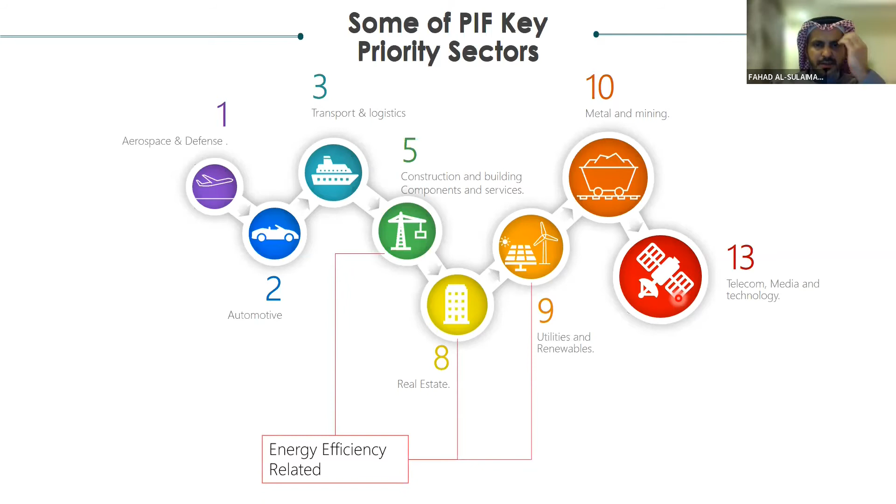When you look at the logistics program again, which is the NIDLP program, a major program in Saudi Vision, it has 4 programs, one of them directly related to energy. By the way, we have a big project now at KFUPM relevant to energy - we call it the Renewable Energy Technical Incubator - where if a student or faculty member at KFUPM, or even outside KFUPM, has an innovative idea, they can participate with it.

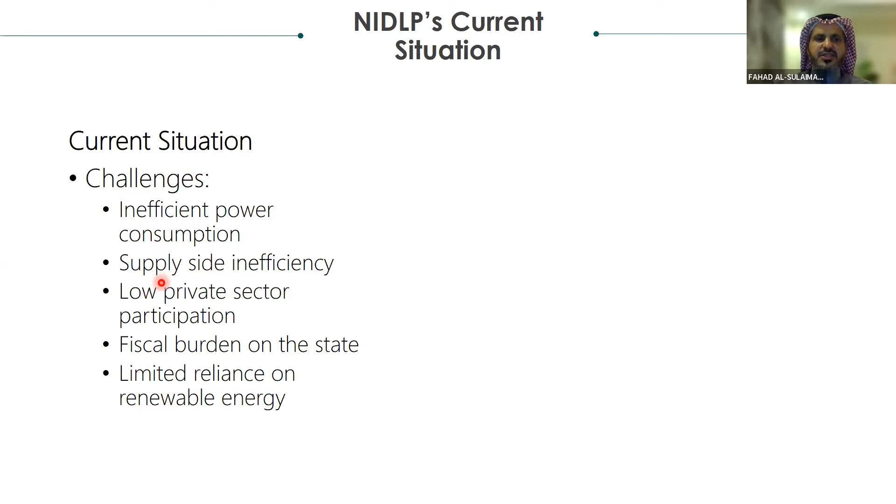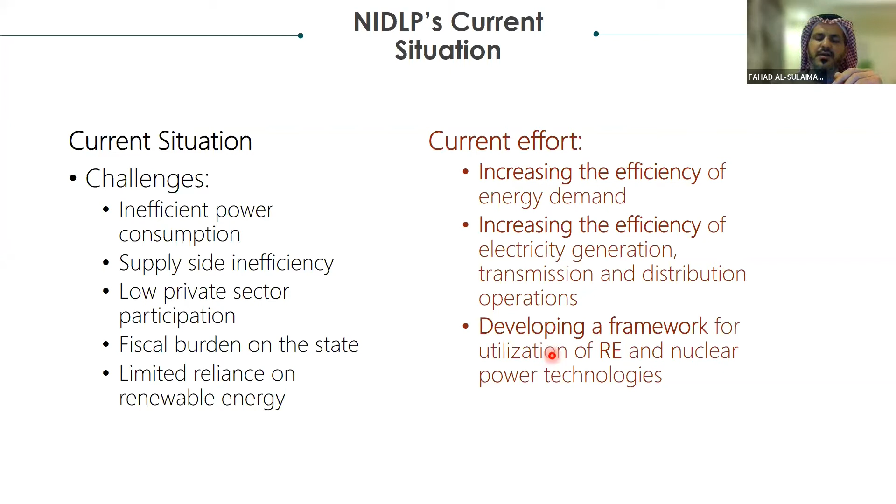In general, in this real situation, there are a lot of challenges - for example, inefficient power consumption, supply side inefficiency, and many others. On the other side, you need to resolve and overcome these challenges. For example, current efforts increase the efficiency of energy demand - where there is energy demand, you need a more efficient system, or likewise for energy production. For that reason, we need to develop the right framework for utilization of renewable energy and other power technologies. For example, the Quality of Life program, which was announced about 1 year ago, addresses how to have a better life among the different challenges you have.

For a better design, which is more efficient, the point is not just to have efficient energy consumption in a building. You have to think about the social aspect, the feeling, the productivity, even for the individual who is visiting or living in building X and Y. There are some criteria in architecture, all of which could be considered for the design.

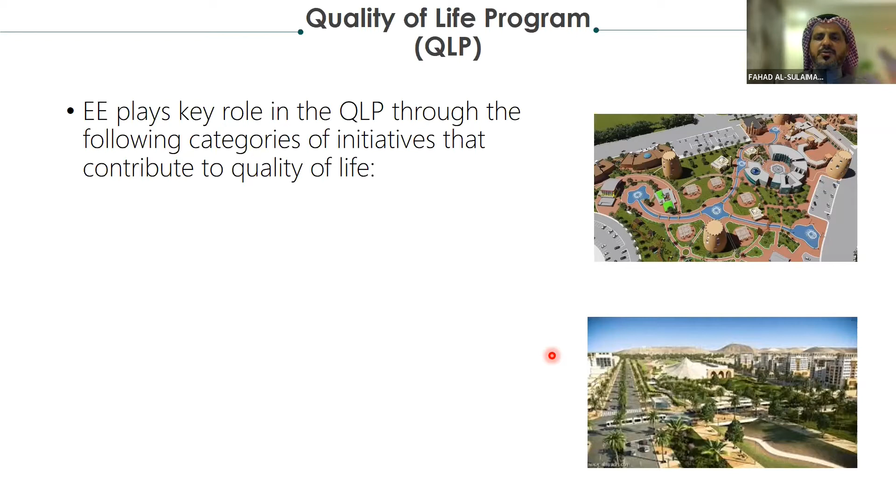As you're aware, His Royal Highness announced the Green Riyadh program, as you can see in the picture. Riyadh will move toward a very ambitious program to be more green. There is already a lot of programs like King Salman Garden and so on, but the point here is to improve the life quality.

One of the main initiatives in the Kingdom, which each one of us should be aware of, is the Tarshid program. Tarshid is a big government or semi-government company owned by PIF, and their objective is to improve energy efficiency for government buildings, and recently they are going toward the private sector as well. There is a business model where they can generate and save money, and from the saving difference they can generate money for new initiatives and programs. So this is one of the main initiatives.

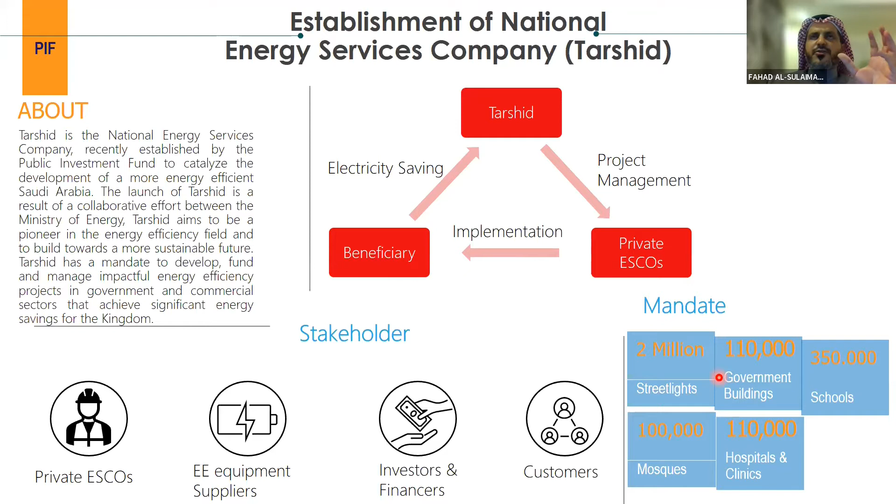For example, their mandate covers 2 million street lights, more than 100,000 government buildings, the schools in Saudi Arabia, the mosques, hospitals and clinics. So it's really a big initiative, huge in scale. They are doing this for the government sector for free, but they have their own business model to generate money out of that.

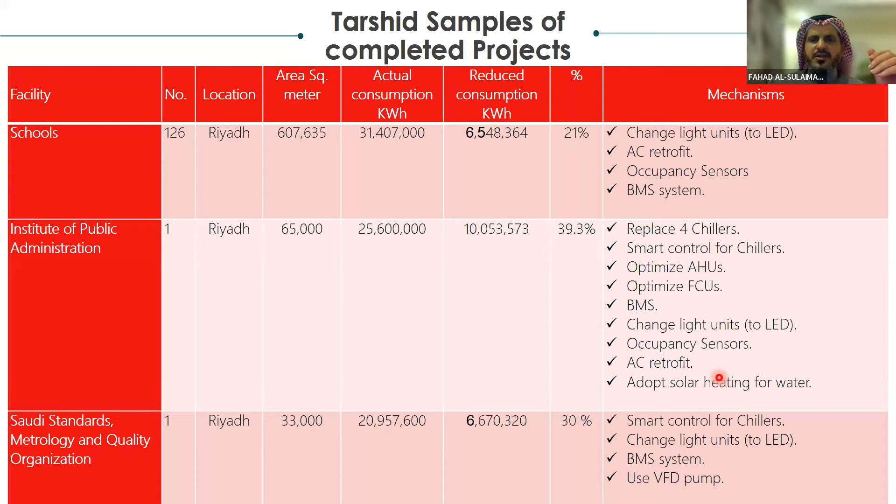These are some examples of their savings. I will not go through all the details, but I want to let you know about the importance of the topic. This is one of the initiatives by SEEC, the Saudi Energy Efficiency Center, in coordination with SASO and different entities in Saudi Arabia. This is just one example to encourage people toward using more efficient appliances.

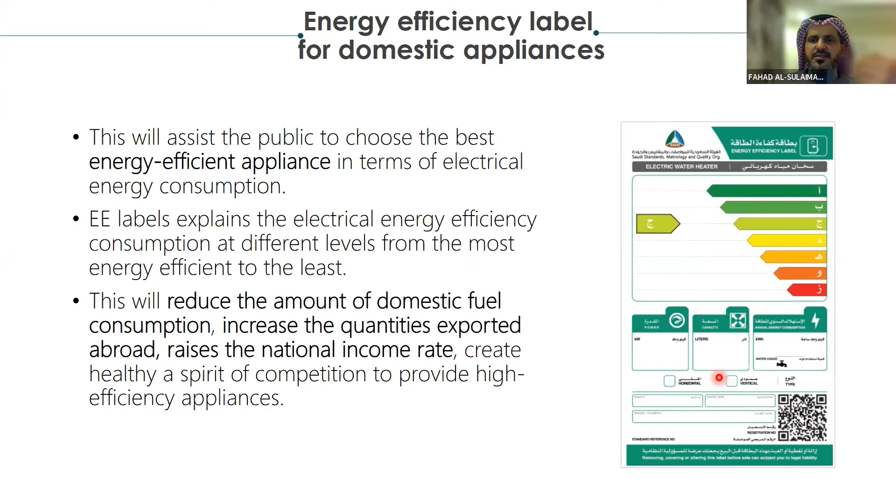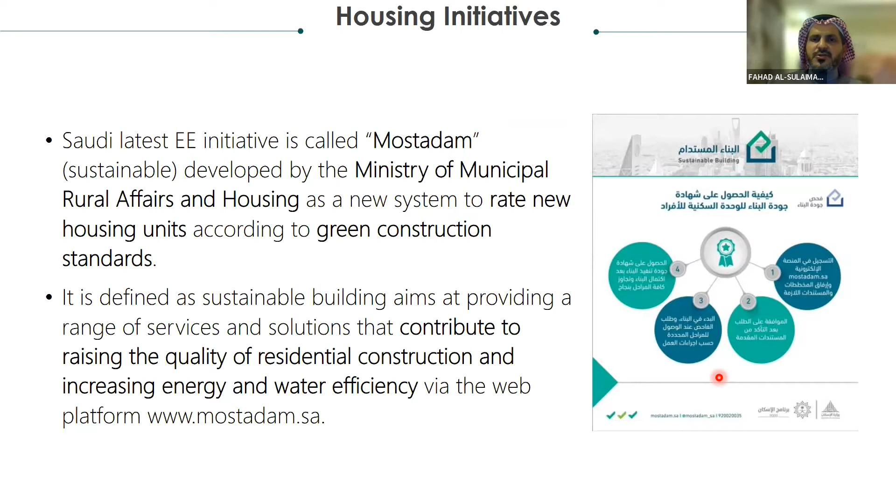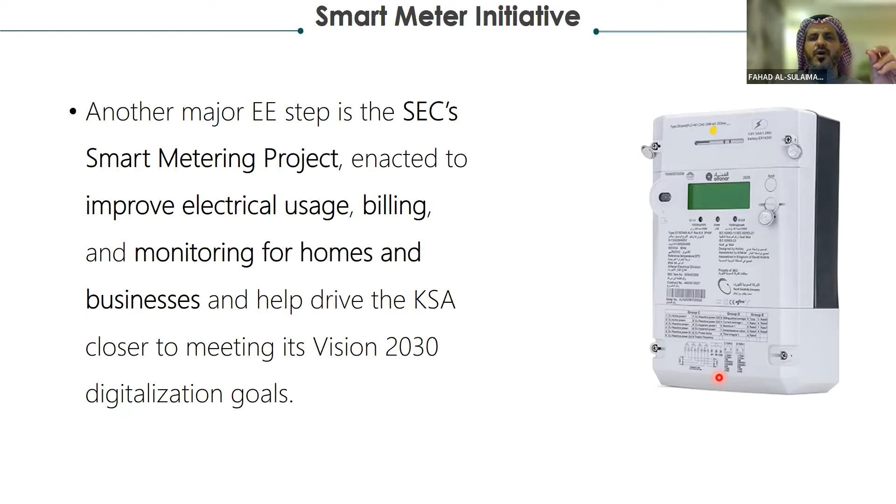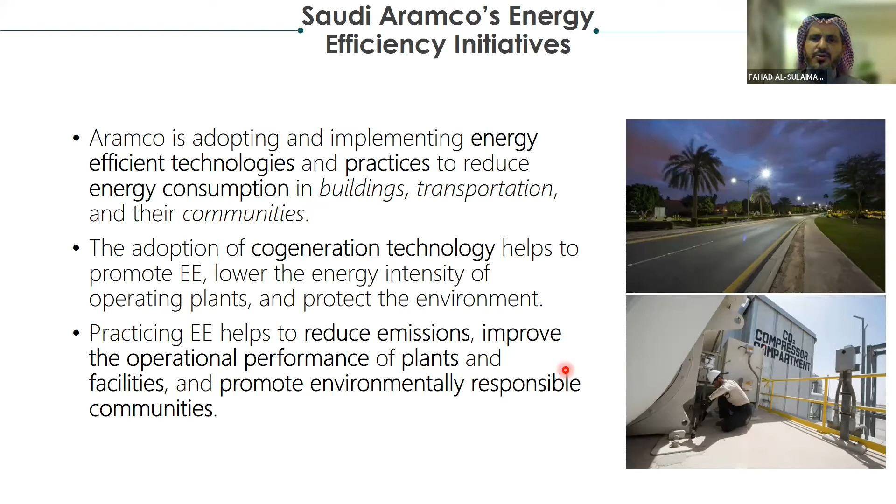One of the things also being implemented now: around 10 million houses in Saudi Arabia will have smart meters. This smart meter can collect all the detail about your consumption, and based on that it can recommend a mechanism to save energy. Aramco is also working on this - it's not just lighting, it could be for the power plant, for compressed air, and there are other benefits. It's not just about energy, because if you reduce energy consumption, you are also reducing emissions from, for example, the power plant or refinery.

As I mentioned, there is also the Saudi Building Code. They have one specific code for energy, another specific code for green building, and also another code for light. So it is becoming more important - the government is taking it more seriously.

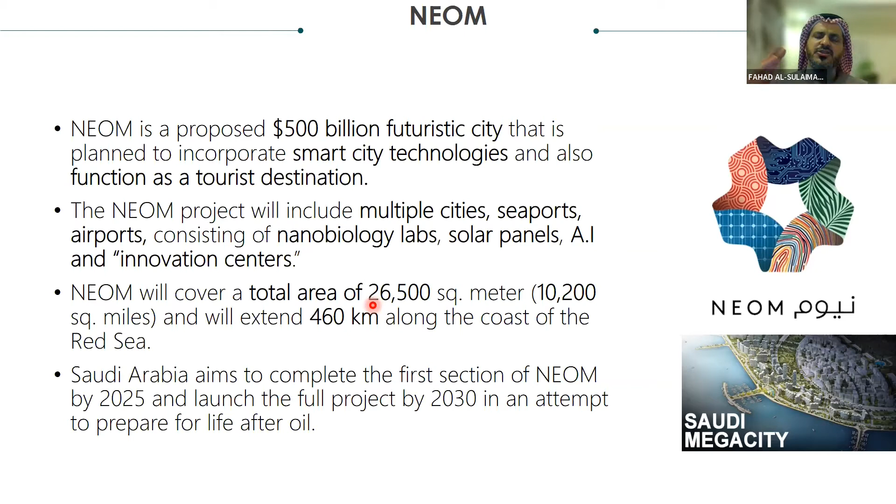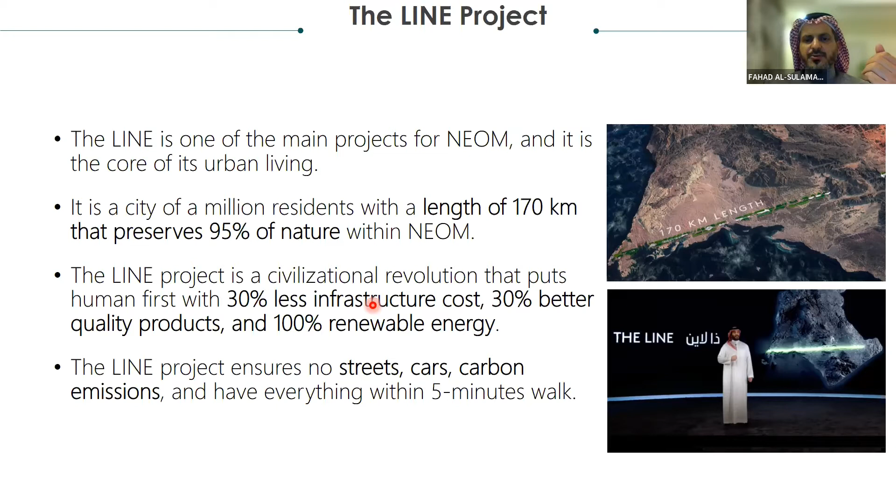Also, if you think about the giga projects in Saudi Arabia, we have a few giga projects. One of them is NEOM, planned to have an investment of $500 billion - a huge city, really big, with 26,000 square meters. This city will take state-of-the-art technology and will operate completely by clean energy, meaning renewable energy, hydrogen, blue hydrogen or green hydrogen, and so on. This is the Line, one of the cities you are aware of - it was announced by His Royal Highness Prince Mohammed bin Salman.

So here in KFUPM, you are aware of the business park, and in this business park, one of the major hotels there will be a green certified hotel. So this is just an example of the importance, or the action, being taken by KFUPM.

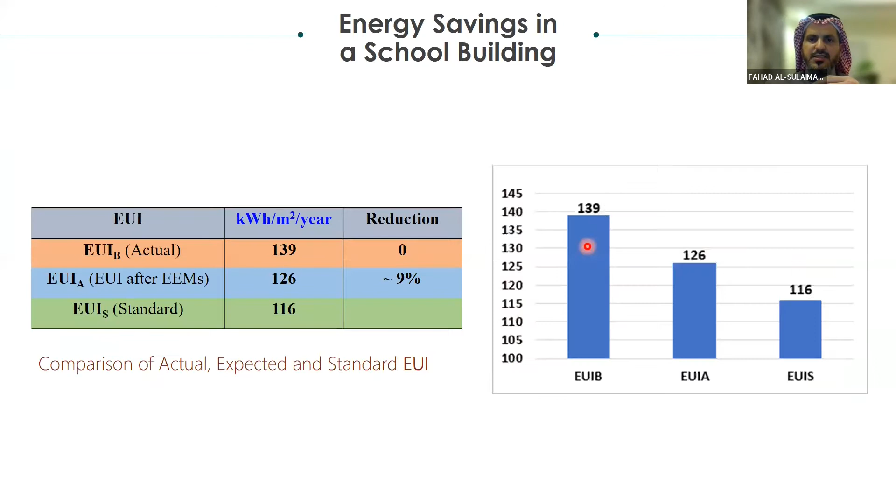So in the center, we have a good number of research related to renewable energy. I would like to let you know what we are doing, or energy efficiency, or in addition, utilization of Industrial Revolution 4.0 on the energy sector. I don't want to bother you with these details, but I would like to conclude with this introduction and give you the bigger picture about energy efficiency. It is really important because when you talk about energy efficiency, you can think about almost each sector, because each sector is consuming energy.

By the way, the word sustainability is becoming a hot topic, a more attractive and important topic, because it has huge impact. When people talk about sustainability, they mean energy, environment, and social aspect. This is just a short introduction about the importance of renewable energy and energy efficiency, and it's relevant to Saudi Vision 2030, and relevant to all the mega and giga initiatives by the government. Thank you a lot.

If there is a short question, we can answer it. I think one of the questions is asking about green building.

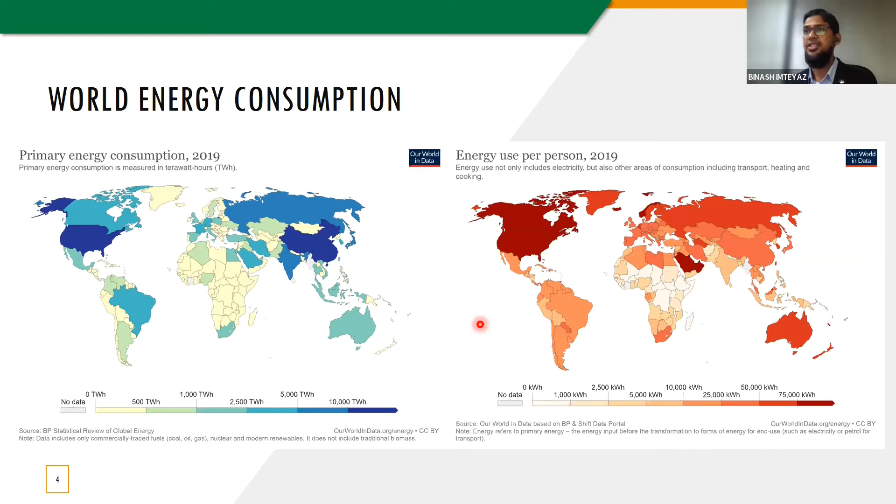So let's have a look at per capita energy consumption in Saudi Arabia. Compared to the world, the total energy consumption in 2019 was 89,000 kilowatt hour by Saudi Arabia, and 21,000 kilowatt hour is the mean for the world. Similarly, for electricity consumption, Saudi Arabia is much higher than the world average energy consumption per capita.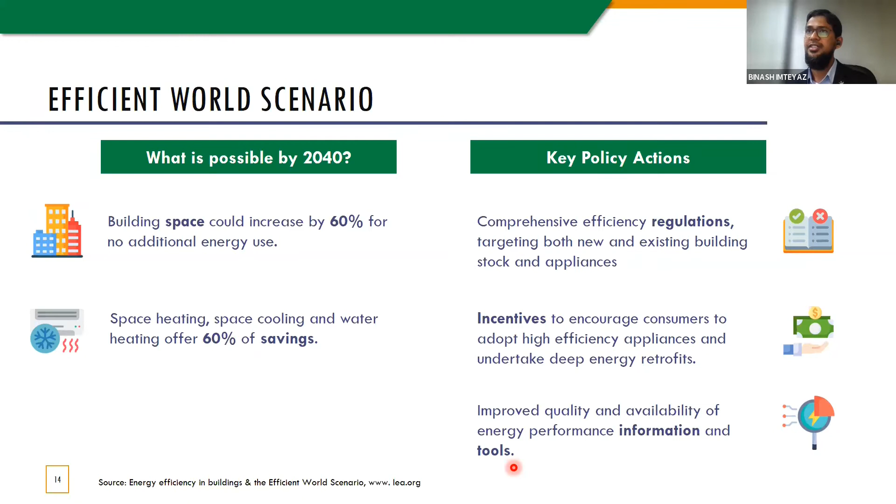Now we will focus on the building design. As in Saudi Arabia buildings are the most energy consuming sector, we will focus mostly on building design in this presentation. The more important factors are insulation, air tightness, ventilation, equipment, and finally renewable energy.

If these are implemented, this can reduce the total heat loss. It will increase the comfort inside the building, the quality of the air, and moisture management. It will optimize the regulation and control, and can be adapted depending upon the temperature and humidity of the system.

Some related actions that can be taken include the orientation and shape of the building, shadings and wind plantation around the buildings, then insulation of the floors, walls, and roofs. Ventilation of the building should be taken care of, like the air tightness among the roof, windows, and frame. Then higher energy efficiency air conditioners, boilers, heat pumps, and other equipment can be employed. And finally, renewable sources of energy should be made more available.

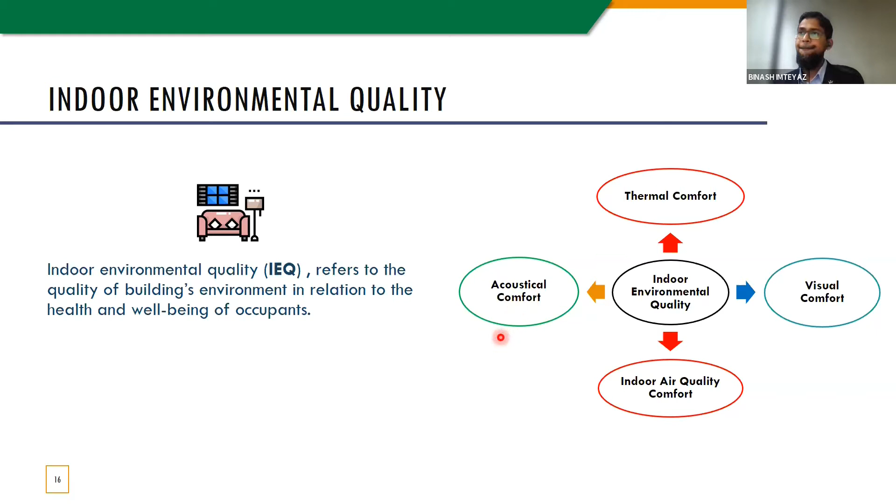Those are thermal comfort, visual comfort, indoor air quality comfort, and acoustic comfort. So we will go one by one through all of them, just to have a brief idea.

Visual comfort is basically a proper lighting system which causes little strain on our eyes and allows us to work comfortably for a longer period of time. Factors include the components we are working on, the light intensity in the environment, and the color temperature of the light.

For example, it depends. Sometimes you basically feel very bored. If you have too much yellow light in your work environment, you will not feel comfortable working in that color. But if you have yellow light in a restaurant, you will feel more relaxed and at ease. So color temperature is also a very important factor.

Light intensity, as we all know, sometimes a room is less lit than required, and this will cause strain in your eyes and headaches. Sometimes over-light is there, meaning the intensity is higher than the recommended value, and this also causes some problems.

Similarly, we can have a problem of glare inside a building, like if there is a reflection from a shiny surface, or if there is a window with bright sunlight falling on our eyes. So all these factors should be considered while we are designing the indoor environment in terms of light.

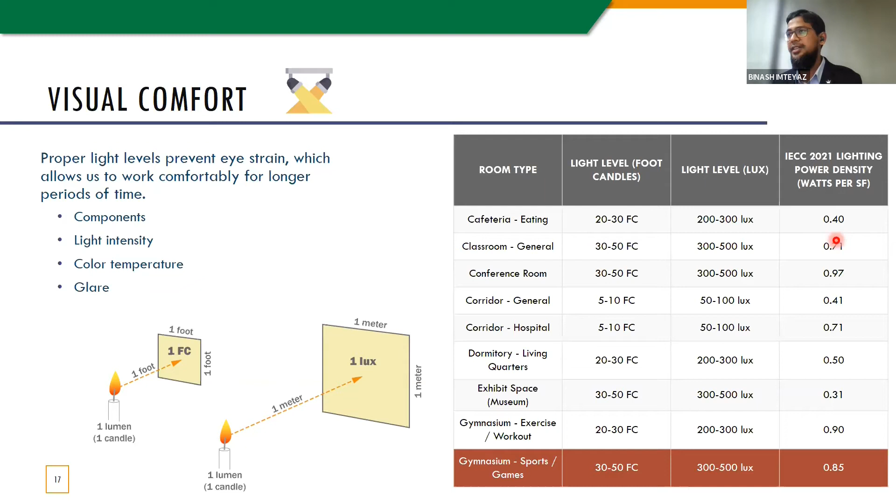Now, acoustic comfort is basically the well-being and feeling of a building or its occupants regarding the acoustic environment. If there is a lot of noise from outside, or continuous or high-pitched sound coming from the AC duct, Wi-Fi routers, servers, or anything similar, this is going to impact our acoustic comfort.

For this also, a standard has been set, and we need to ensure it doesn't exceed certain limits. For example, for complex tasks, the equivalent continuous sound level in general tasking should not exceed 55 decibels. However, for offices with very professional level work going on, it should not exceed 40 to 45 decibels.

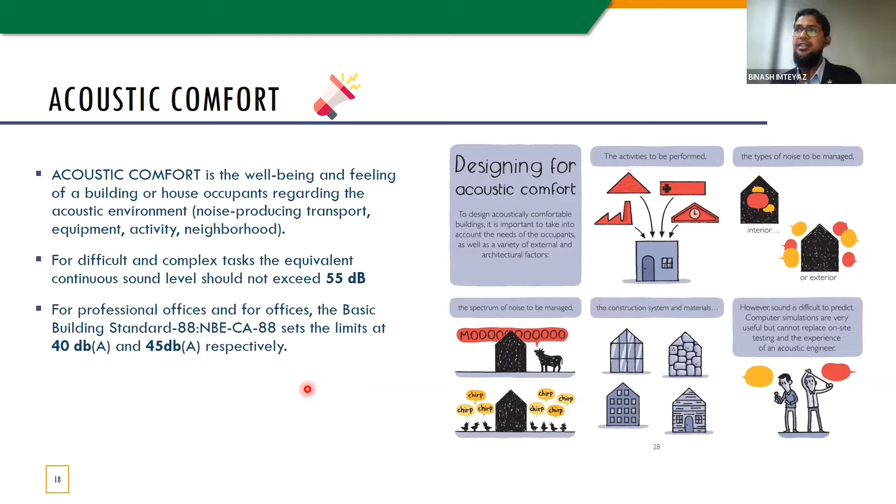There are design factors for acoustic comfort, depending upon the surroundings and the type of materials being used, and what type of offices or other buildings are around, which we need to take care of while designing a building.

Now, indoor air quality comfort. This basically refers to the amount of pollutants present inside the indoor environment, and indoor air pollution can cause different problems like nausea, headaches, sick building syndrome, and lots of other hazardous diseases.

Depending on the environment condition, whether it's inside an industry or a commercial building, we have different kinds of pollutants, and these need to be monitored, with a proper ventilation system in place to minimize the effect of pollutants.

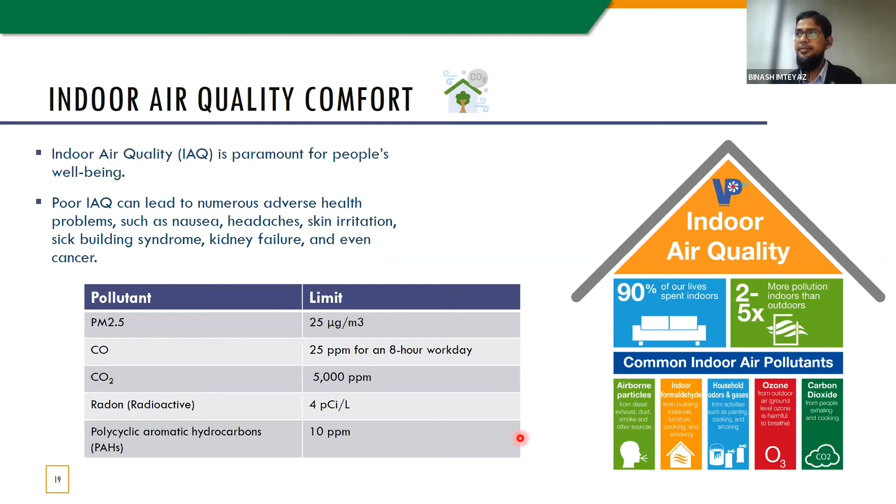Now let's come to thermal comfort. Thermal comfort is described as the state of mind when you feel comfortable with the environment.

Thermal comfort can be affected if you have very dry air, you can feel draught, which is thermally uncomfortable. If you have radiation asymmetry, one side is very hot, like if you are sitting near a boiler in an industrial facility, this will cause radiation asymmetry. Or if you have solar radiation falling on one side of a wall, you will feel radiation asymmetry, which also causes discomfort.

Then there is vertical air temperature gradient. If you have more than 3 degrees temperature gradient from foot to head, it will cause discomfort for human beings. This is also why, while designing an indoor environment, we take care about the uniformity of temperature inside the building. Moreover, floor temperature is also not negligible—it is another factor.

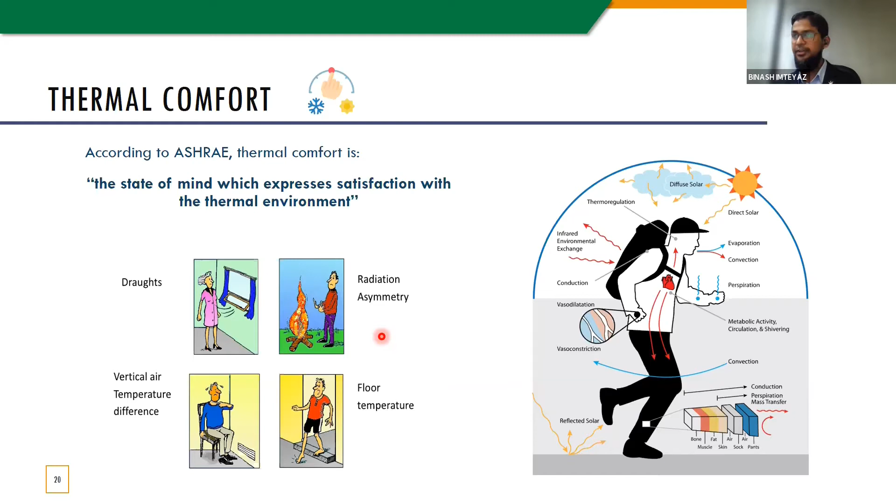So what are the factors for thermal comfort? Basically, there are 4 environmental factors and 2 personal factors. The 2 personal factors are clothing and metabolic rate—what type of clothing you are wearing inside a building or house, and what kind of activity you are doing inside the building. This constitutes the metabolic rate, and these are the personal factors that affect thermal comfort.

Then there are environmental factors like humidity, air speed, air temperature, and radiant temperature. We basically need to take care of all these factors while we design a building, and I will discuss this with some examples in the next slide.

So when do we say we are thermally comfortable? Thermal comfort is basically relative—some people might feel comfortable at a particular temperature, but another person may say he's not comfortable with that temperature and kind of environment. So to design a thermally comfortable environment, it has been suggested by the ASHRAE standard that if more than 80% of the occupants express their satisfaction, then the environment will be called thermally comfortable.

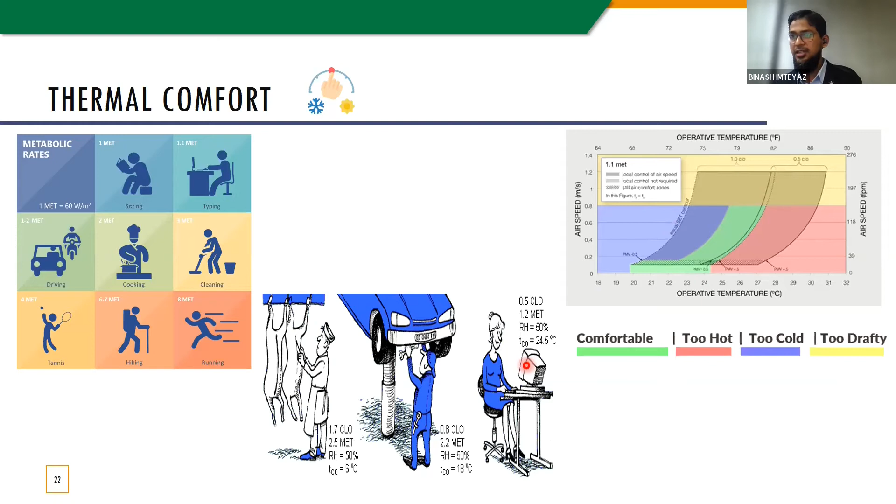Various factors need to be taken into account while designing the indoor environment, ranging from the insulation, orientation, the material we are using, and the kind of ventilation and air recirculation inside the system. So basically all these factors, like air temperature, orientation, thermal inertia, and the type of material we are using, can only be implemented at the time of designing a new building.

However, when we try to make the old building more comfortable, we need to meddle with the HVAC system, which basically controls the temperature, the air velocity, as well as the humidity inside the environment.

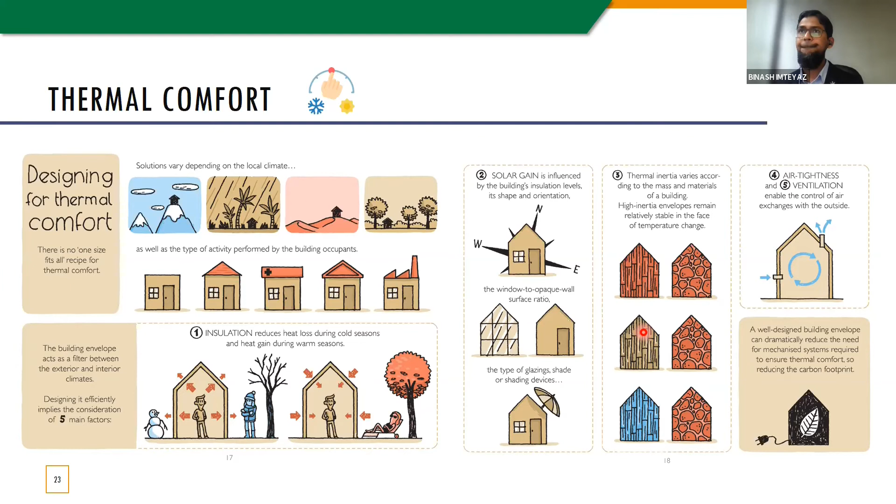So we will not go deep into the HVAC system, but just a brief introduction. There are two main kinds of air conditioning systems: one is non-ducted and then the ducted type. In non-ducted type, we have a split type or window type AC system, which is most common in residential buildings. Ducted types are like package type or centralized type, which is more common in commercial buildings.

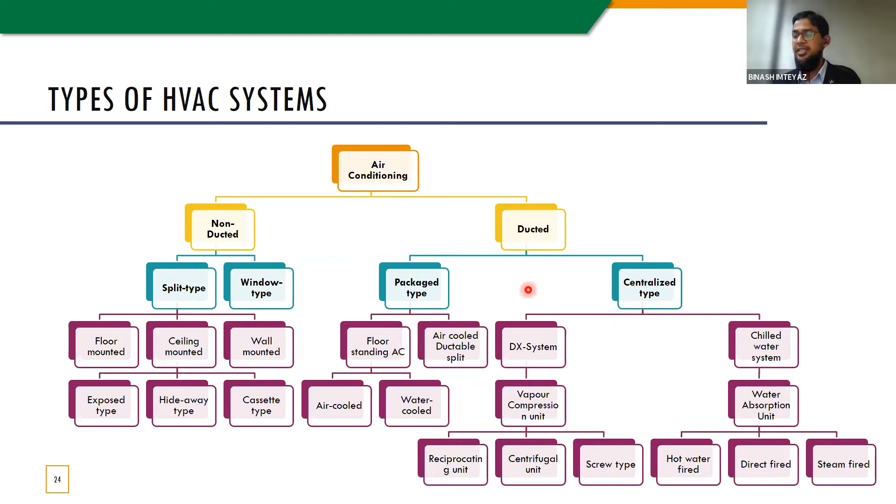So this is a design of the HVAC system. This is a window AC system, and there is no provision for fresh air inside either a window AC or a split AC. In both of these systems, the same air is being recirculated using this fan, and it is being cooled. So basically in a non-ducted system, we don't have any ventilation for the HVAC system.

However, in the ducted system, we have provision for fresh air recirculation. So we can add some fresh air, and we can also recirculate depending upon how much recirculation is required. The amount of recirculation again depends upon the type of building and how many people are inside the building, and what is the concentration of carbon dioxide and other pollutants inside the building. This will determine how much fresh air should be recirculated. We do not want to recirculate all fresh air because it is going to cost us a lot of energy, so an optimization between the fresh air is the best option.

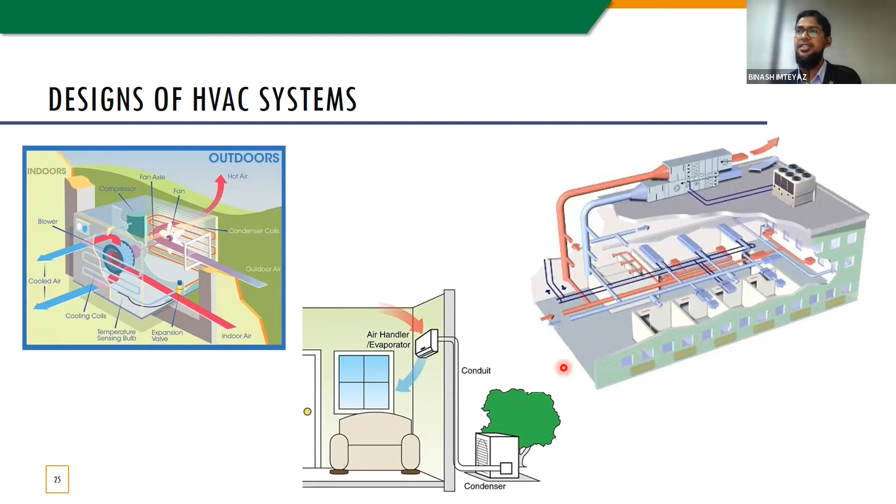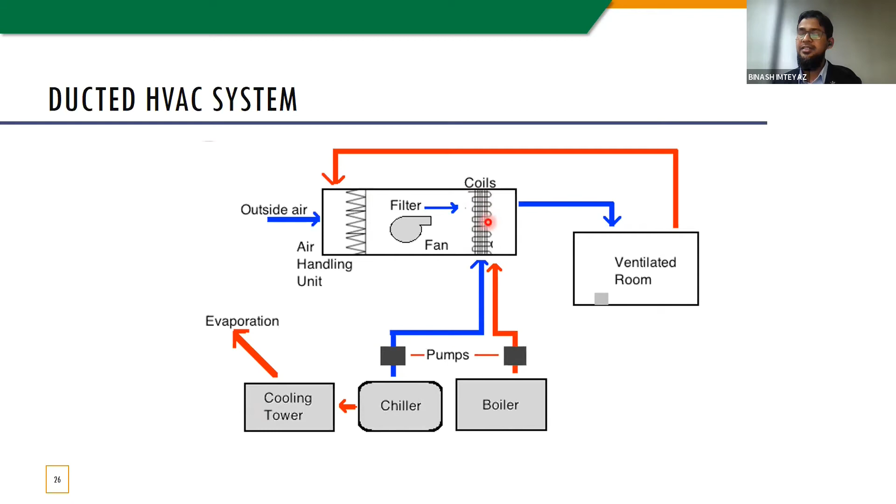This is basically a typical schematic diagram of a HVAC system. So this is a ventilated room where cool air is coming in, it gets heated, and we have a suction which is recirculating this air, and some part of outside air is being mixed, filtered, and then thrown to the coil, and again recirculated into the ventilation system. Now, depending upon either it is for the heating or cooling, we have a boiler or a chiller or a cooling tower, which is providing the energy transfer through these coils.

Now, without going deeper into the HVAC systems, we just want to get an overview about the energy performance. Energy performance of an air conditioning system can be evaluated using coefficient of performance, which is basically the ratio of heat absorbed divided by the total power consumed by the HVAC system. Higher the value of COP means the better the efficiency of the system. We know that the split AC and the window ACs have very low COP.

So these are less efficient than if you have a chiller, which can range up to 6.5 in the value of COP. These are the energy ratings which you can find when you are going to buy any AC or any electrical equipment, appliances or equipment.

Now, why is it very important to save energy at the end user? Because the amount of energy you are saving at the end user is affecting the producer. For example, in this system, I will show you how it is going to affect.

Basically, whenever there is thermal energy involved, the total efficiency is very low. For example, in this case, chemical energy is converted by the internal combustion engine to produce thermal energy, which is only 30% efficient. Then this diesel energy is converted into mechanical energy, and this generator converts mechanical energy into electrical energy, which drives the motor to get mechanical energy, and finally we get the pump for pumping the fluid. So the total efficiency of the system from here to the end will be the multiplication of all the efficiencies from diesel to generator to motor and pump, and this will be only 12%.

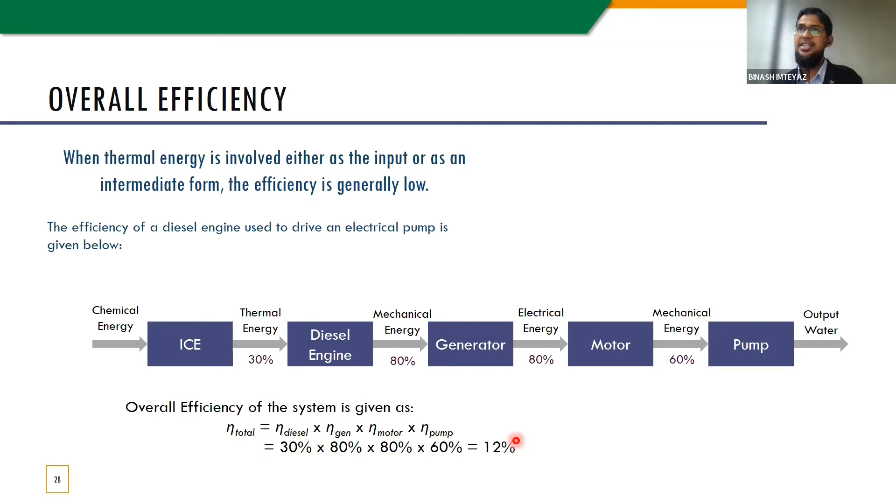Now, this is the impact of the energy efficiency on the total efficiency. However, the energy efficiency also has a tremendous impact on the cost of the energy.

Point of use cost is defined as the cost of energy per common unit divided by efficiency of the conversion. So the higher the efficiency of the conversion, the lower the point of use cost you will have.

For example, if the purchase cost of electricity is $0.2 per kilowatt, and the efficiency of the equipment you have is only 30%, then this is actually how much you are paying per kilowatt hour of energy usage. Similarly, if you have purchased energy at this cost, and this is the plant efficiency, this is the total energy wastage.

So basically you are effectively using only 30,000 kilowatts, and wasting like 70,000 kilowatts if the plant efficiency is only 30%. So you are wasting a lot of money if you're not saving or increasing the energy efficiency of the system.

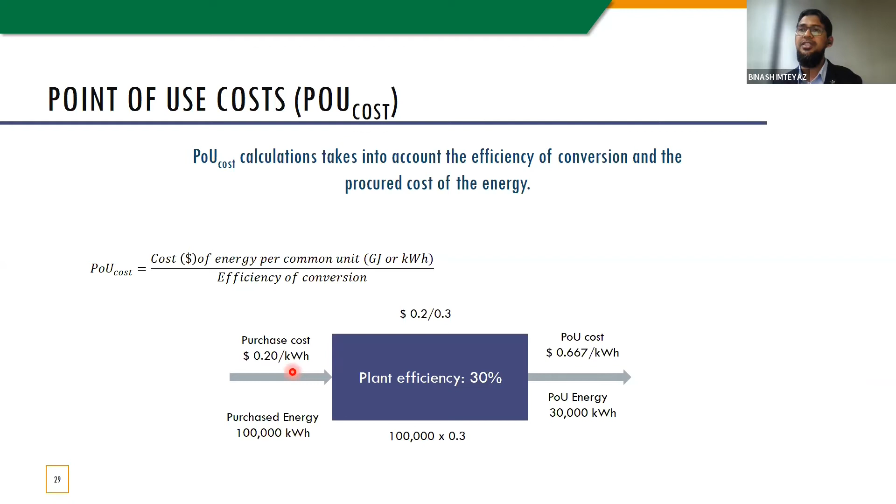So for making all the standardization, how efficient should a building be? Energy use intensity is used for this, where energy use intensity is defined as the total amount of energy per unit area of the floor.

For example, in a restaurant, it shows the site energy efficiency as well as source energy efficiency depending upon the efficiency of the restaurant, as shown in the slide before. The site energy efficiency is around 300 kilo British thermal units divided per square feet, up to around 600 for the source EUI.

For different building types, the median energy use intensity described in the United States is shown here in this data. And there are also standard values.

What should be the standard value for a restaurant? What should be the standard value for a supermarket, for a hospital? While conducting an energy audit, we can assess what the energy use intensity is, and compare it with the standard value and benchmark, and make improvements depending on what energy efficiency measures can be applied to improve the energy efficiency of the building.

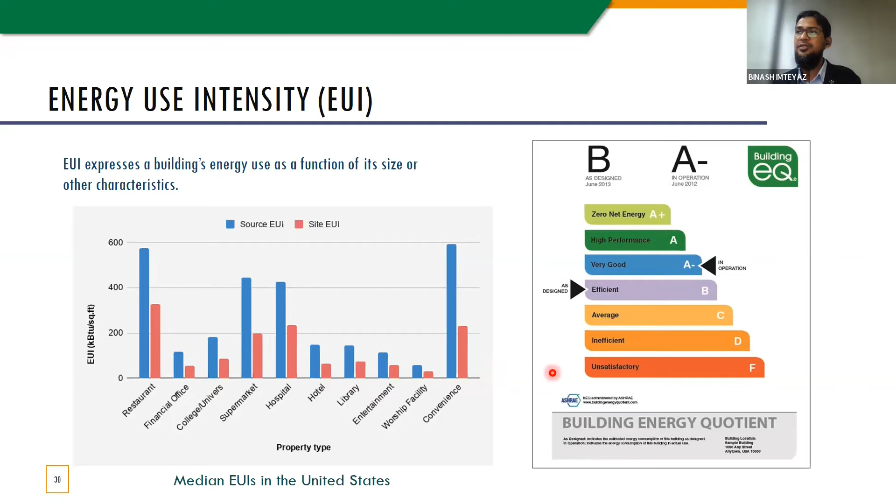Building performance analysis can be done using energy audits and assessment, which is basically verification, monitoring, and analysis of energy use. So we put some mechanism to analyze how much energy is being consumed in which sector, in which sections, and how inefficiently we are losing energy in different aspects.

Once we have all the data, we investigate it through analytics or using software like ESP-r or DesignBuilder, and we can find recommendations on how to improve the energy efficiency of those buildings.

Now we will discuss some energy behavior change programs and education that are important in the Kingdom. Setting up energy policy, targets, and goals for organizations is one of the very important energy behavior change programs that will help increase energy efficiency and overall educate staff members on energy efficiency.

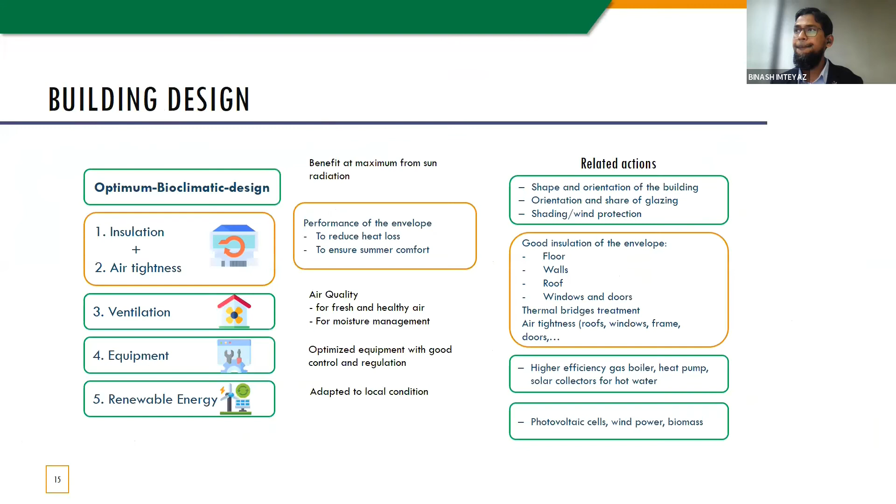Instead of 10 minutes, right? Okay, 5 minutes.

Sulaiman asks: should we have an energy consultant for new buildings to fulfill code requirements? Yes, of course. So many energy service providing companies have started new entrepreneurship inside the Kingdom of Saudi Arabia because of this reason, since you need a consultant who will advise you to follow the code and make a new or existing building more energy efficient. However, due to lack of proper regulations and implementation inside Saudi Arabia, there is not too much prospect for that right now. But within a few years, we expect it to grow to a very high number, as we have an ambitious plan to go for 50% renewable by 2030 and net zero by 2060. So later on, it is going to come - we are going to have lots of need for energy consultants, and there are a lot of opportunities in this sector.

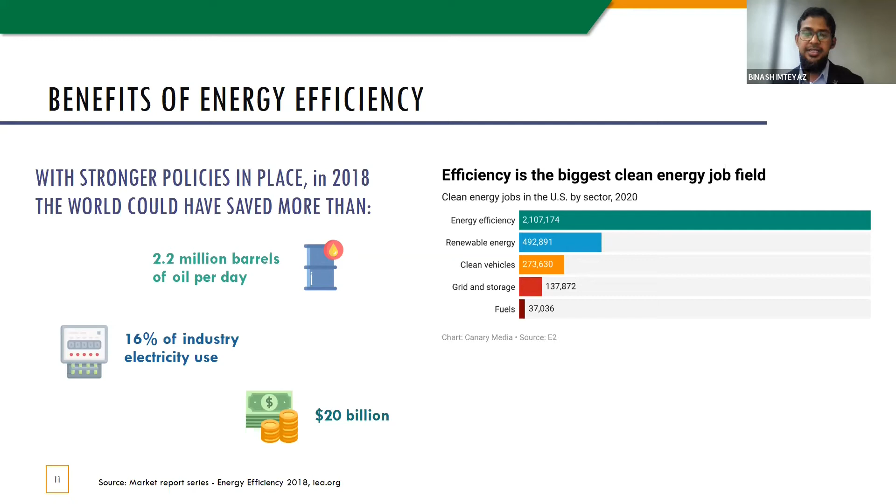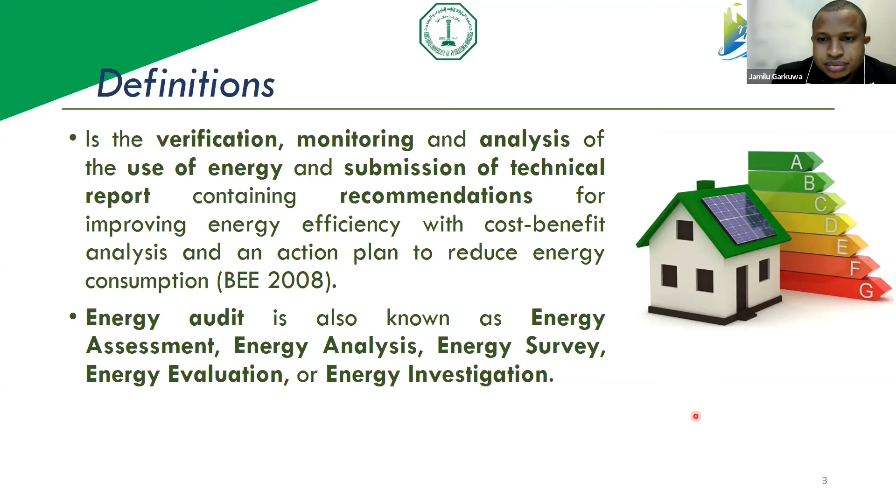So in a nutshell, to summarize what energy auditing entails: in energy auditing we pay attention to how much energy a facility or building is using, where it is using this energy, whether it's being used efficiently or not, and if we can improve this through conducting energy auditing. Of course, this will come from our recommendations.

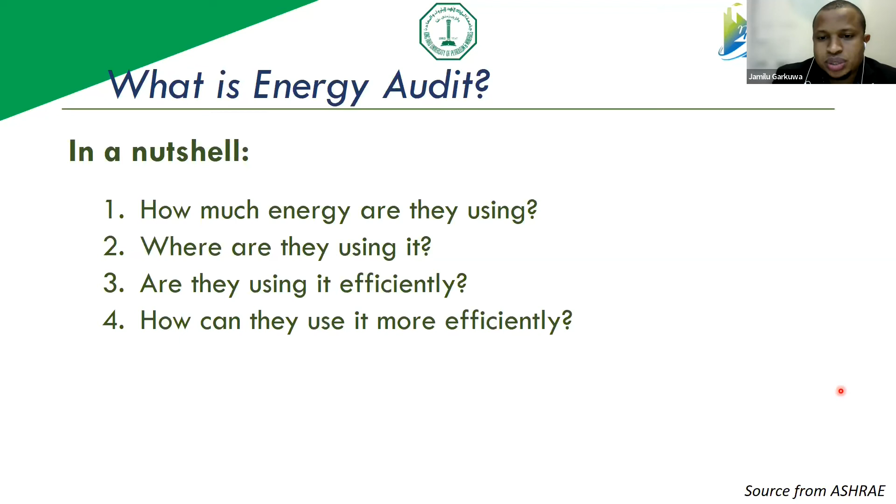There are some basic steps which any energy auditing, irrespective of the level, should somehow contain. We start by analyzing historical energy use, because this will give an idea of how energy is being utilized in such a building or facility. Preferably, at least two years of historical energy data is preferred, but if you can only get data for a year, it should suffice in some cases.

After analyzing this historical energy usage, we gather data, consider operational features, indoor air quality, and indoor environmental quality of the location where the building or facility is located. We then move into identifying potential measures, carrying out economic analysis and calculations, which enable us to understand and come up with appropriate measures to improve energy utilization in such space. At the end, there has to be a well-documented report submitted that contains the whole process, which the client can use to improve energy efficiency in his or her facility by implementing some of the recommendations.

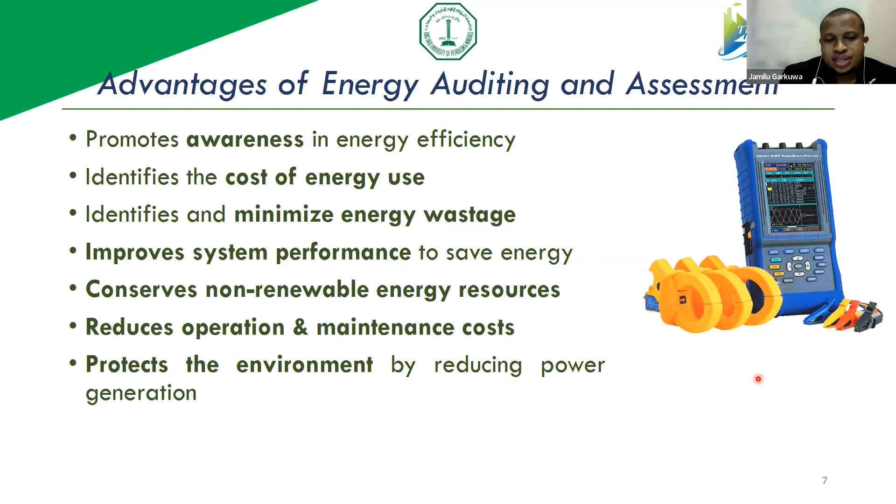If we understand a building in the context of energy utilization, if we have building A and a certain quantity of energy is supplied to that building, at the end of the day the useful energy that we get is less than the supplied energy. Why? Because there are some losses along the line.

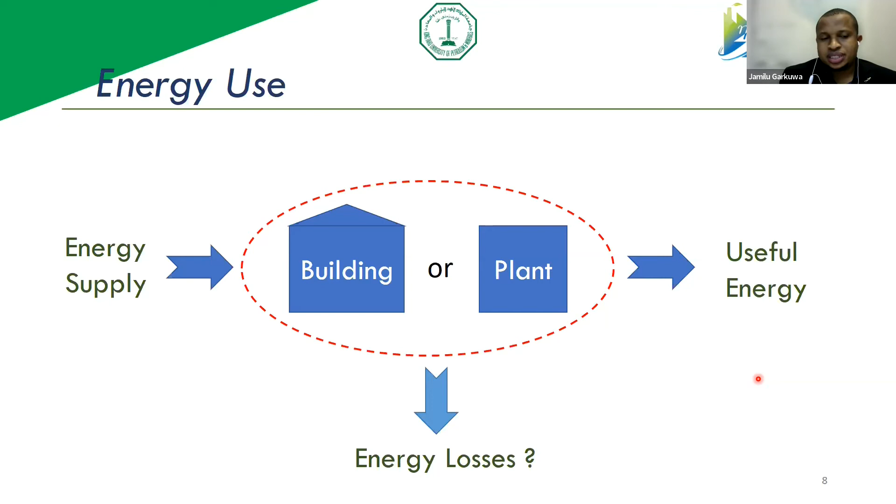Energy auditing allows you and assists you in finding out where these energy losses are taking place. If you are able to locate them, you would be able to devise some means to minimize, if not eliminate them completely. So this is why energy auditing and assessment is key.

So what are some key areas in any energy auditing which need some attention? While conducting energy auditing, one of the most important aspects is the building envelope, because as we know, in solving any problem related to building and construction, the best way to control a problem is don't allow the problem to come into your building. If you are able to keep the problem away from your building, you would save a lot. This comes if you carry out effective building envelope design and construction, as was highlighted previously.

This is where you need to adhere to the codes and standards. You need to ensure that the U value has been met. You need to ensure that the materials utilized are of low U value to be able to minimize this problem.

The heating, ventilation, and air conditioning system, as we've seen, is an integral aspect, especially in the context of Saudi Arabia. The lighting system is often overlooked, but depending on the nature of the facility, sometimes it consumes a great percentage of the total energy consumption.

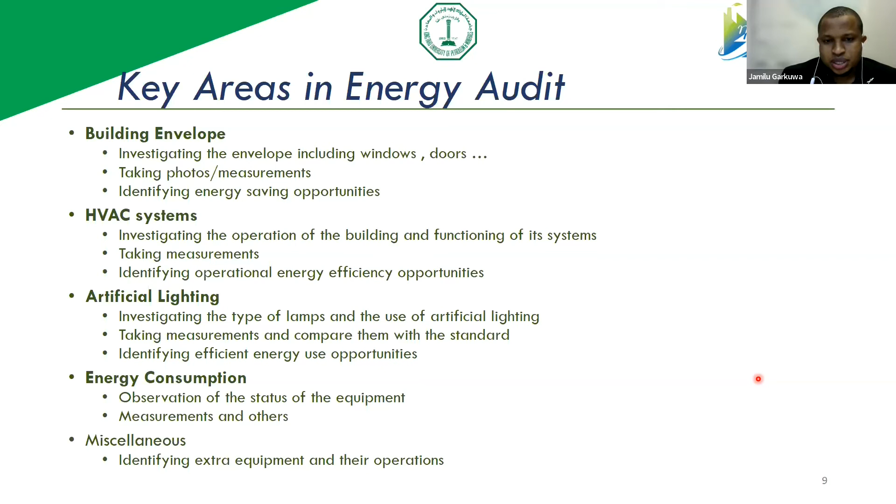So now for us to understand a building as an energy system, a lot of interaction takes place between a building and its surroundings. There is also other interaction that happens from people, equipment, and utilities within the building. So there is a lot of exchange that takes place, which requires investigation in order to improve the energy efficiency.

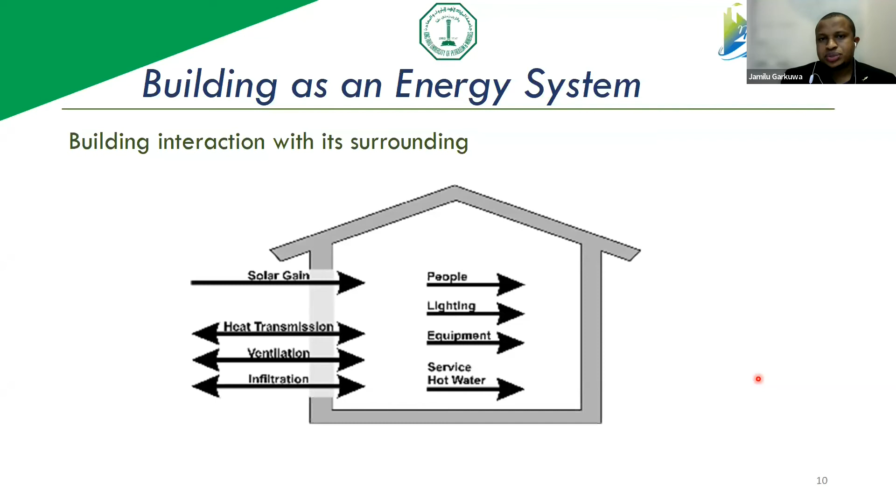What are the various levels or types of energy auditing? There are different levels. As presented by Dr. Binash previously, according to the American Society of Heating, Refrigerating and Air Conditioning Engineers, we could say there are 3 main levels of energy auditing. However, we also have what we call benchmarking, which is almost the current level of the building or facility. So we have 3 levels of energy auditing, as we would see in detail as we progress.

I would like to highlight here that the complexity of the task and demand of the energy auditing increases with the increase in the level of the energy auditing.

Level 1 energy auditing is basically a walkthrough analysis or preliminary audit. It requires less work, less analysis, and less cost compared to level 2. If you choose to go for level 2 energy auditing, you cannot skip level 1. So conducting level 2 means you are starting from level 1, and indirectly level 2 will include level 1 plus other aspects.

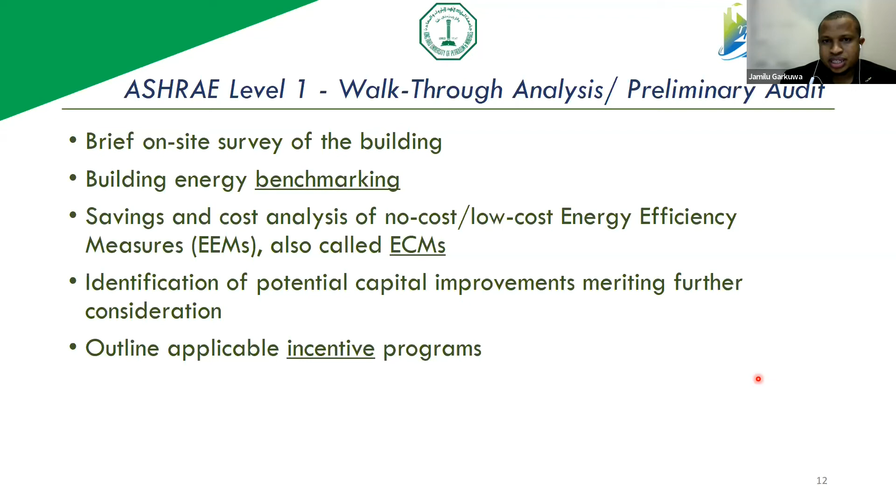One needs to identify potential means for improving energy efficiency, and there has to be some incentive programs outlined as well. Building on from level 1, level 2 requires a detailed survey analysis of the building, a detailed breakdown of energy use and energy sources and their end use, identification of energy efficiency measures, and other aspects in addition to what was conducted previously.

In a situation where level 2 energy auditing has been conducted and there is need to further investigate certain aspects, for example level 3, which is a detailed analysis of capital intensive modification, the two parties agree that some recommendations require further investigation to adequately comprehend and estimate the savings and get a clear picture of the energy efficiency measure. There could be a subcontract to continue from level 2 to perform level 3 energy auditing.

As we've seen previously, sometimes there is need for building simulation tools in energy auditing, which are required in level 3. Usually in level 1 and level 2 there may be no need for such simulations, but in order to accurately get the details of some recommendations in level 2, there may be need to go to level 3 and use these simulation tools.

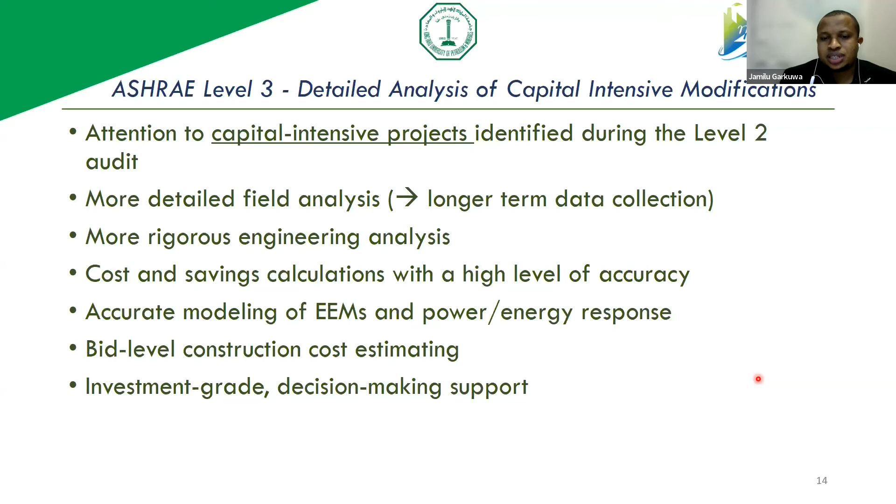Coming to energy auditing tools, the instruments used to conduct energy auditing can be classified into three categories. Some measurements are conducted on the spot, where you take a measurement with an instrument and then move to another location, repeating as required. Then there are temporary measurements conducted using data loggers, which you install, for example, in the main feed of a building or facility, and leave for some hours, days, or months depending on the project requirement. There is also permanent metering integrated with the building.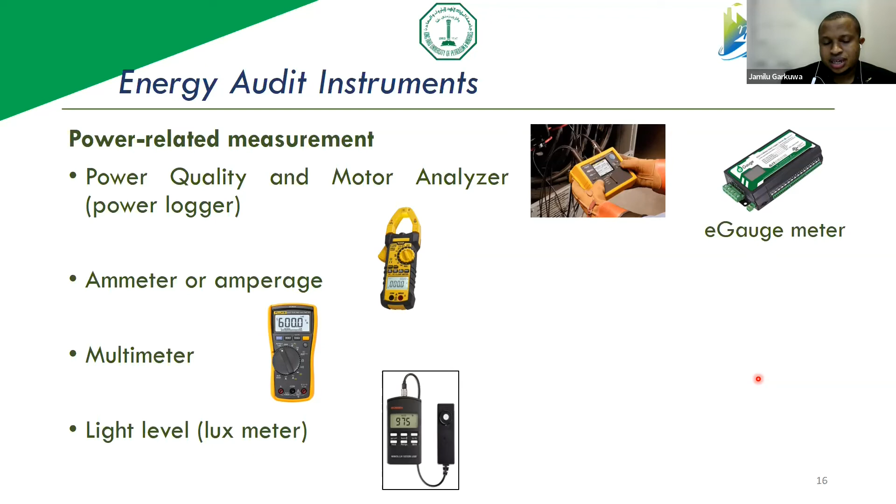Starting with energy auditing instruments, we have the power quality and motor analyzer, which has a function similar to an e-gauge meter. We also have other tools required for power related measurements, such as the ammeter and the light level meter for light measurements, as we can see in the slides to come.

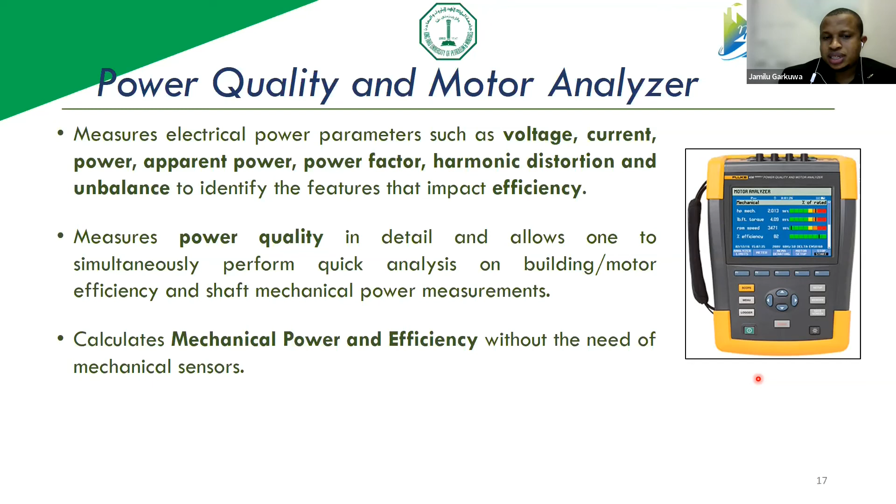The power quality and motor analyzer measures electrical parameters like voltage and current, the basics, and in addition power factor, harmonic distortion, and unbalance. This enables one to get clear knowledge of the power quality at that location and identify if there's need for attention. It measures power quality in detail and allows quick analysis using a user-friendly screen. It also calculates mechanical power and efficiency.

So the e-gauge meter has an almost similar function but has some flexibility. Depending on how the electrical design is conducted when it comes to the main feed of a building, the e-gauge meter may come in handy because it's quite flexible. It has about 15 channels, which will allow you to get the overall electrical load of the building, and also segregated load, for example, for lighting, for the pumps, for HVAC. Using one e-gauge meter, you can connect 15 channels. So it's very flexible, with the help of CTs - current transformers are required in this regard.

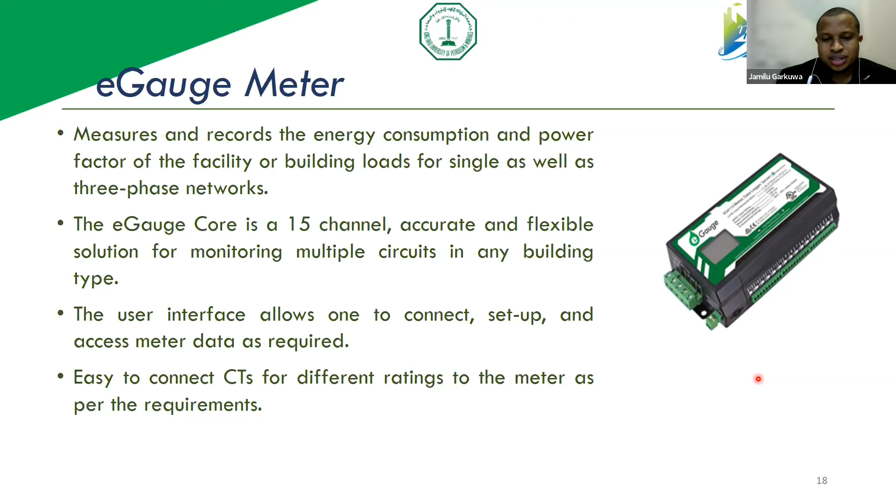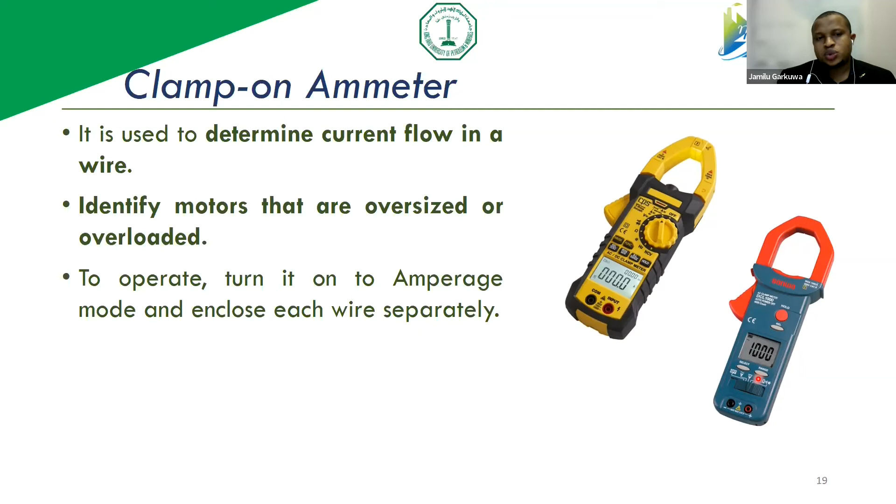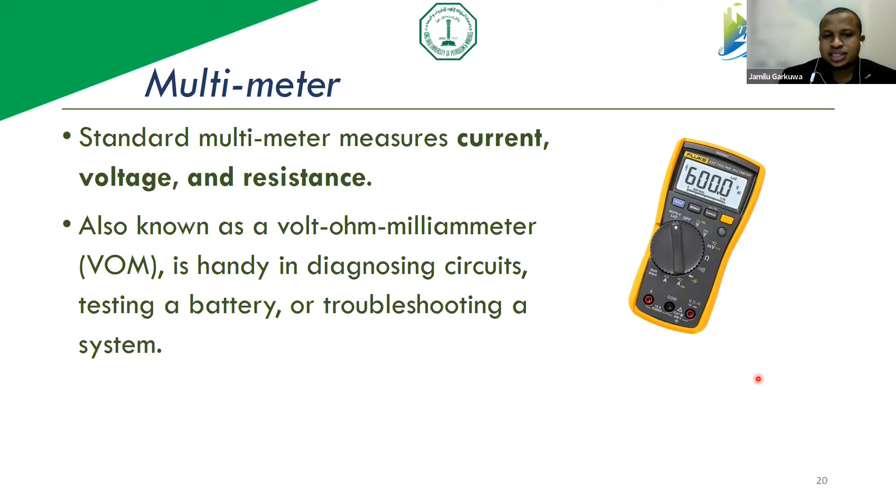So the clamp meter allows you to check, especially to understand, because as we saw in the previous slide, these current transformers have sizes. So you need to check with the clamp meter to understand if there is a current flow in that electrical panel, and also to understand the size of the current transformer which you may need to use in monitoring the power in that building or facility. It could also be used to identify motors that are oversized or overloaded, so it's also important. This is like an advanced version of a clamp meter - you use it to measure current, voltage, and resistance, and it's also used in diagnosing circuits and testing batteries and other functions.

So the digital lux meter is an instrument utilized in measuring the quantity of light received at the task plane in any facility or location. As we've seen in the previous presentation, there is a certain quantity of light, or light illuminance, recommended in different locations based on the function. So this is the instrument you use to take this measurement and identify whether light is provided efficiently or inefficiently, whether there's enough light. If there's enough light, how is it being provided using the lighting power density - you'll see how much energy is consumed in providing this light, if it is in accordance with the standard, and also how the light is distributed, because it's very important to distribute light uniformly in any space, especially where the light is needed. So this is the instrument utilized for such measurement.

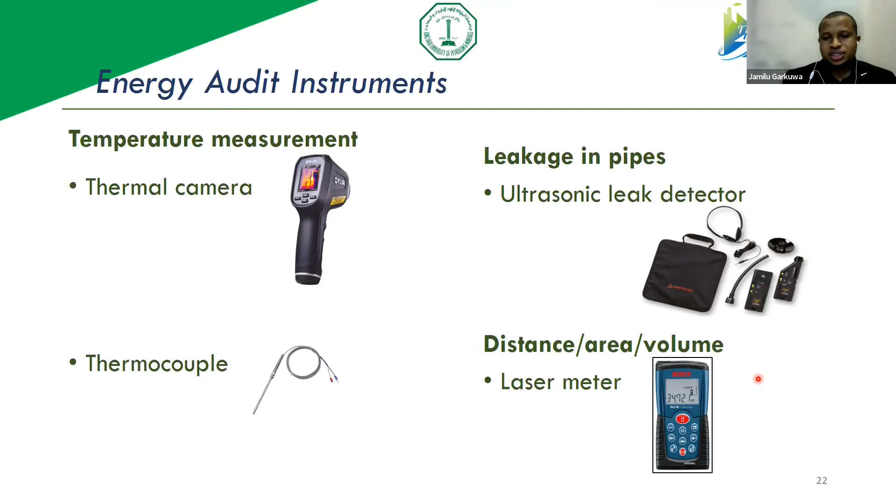As we've seen previously, it's highly important to ensure that the building envelope is designed and constructed according to the requirement of the standard. Thermal imaging camera is used in order to check this during an energy audit - to identify or check the efficiency of the building envelope. It's used for electrical inspections and radiant heat location, be it in cables, in the building envelope, or in electrical panels. It's very important because there is need to identify heat loss. The building envelope comprises the roof, the foundation or floor, the windows, the doors, the walls, so it's very important to check how airtight the building envelope is from various components. The thermal camera will allow you to check for temperature ranges between -20 to about 650 degrees Celsius, depending on which type is deployed for such purpose.

Other instruments used to check thermal comfort during an energy audit are data loggers. We have the temperature and relative humidity data logger, the light and occupancy data logger, and a CO2 sensor, which in addition to its function also allows you to check the temperature and relative humidity in addition to CO2 levels. We have some web-based data loggers, and for some motors, especially for industrial applications, smart sensors to check the efficiency of motors as well.

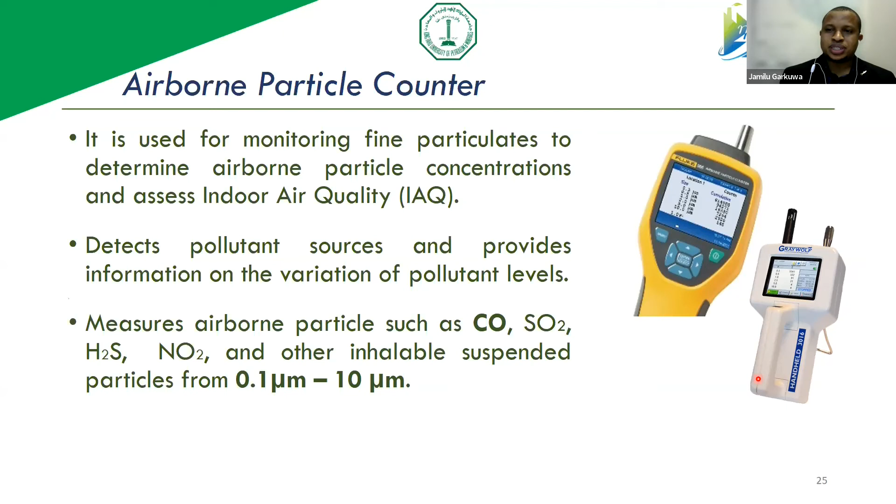So the airspeed in a space is an aspect of thermal comfort, and it also needs to be investigated. For example, a thermal anemometer could be deployed to check temperature, velocity, and direction of fluid, be it air or liquid, in a space, because if the speed is too much or too low, it will affect thermal comfort. So it's important to check all this.

A pitot tube also measures the velocity of a flowing fluid. A heated thermocouple could also be used to check the temperature.

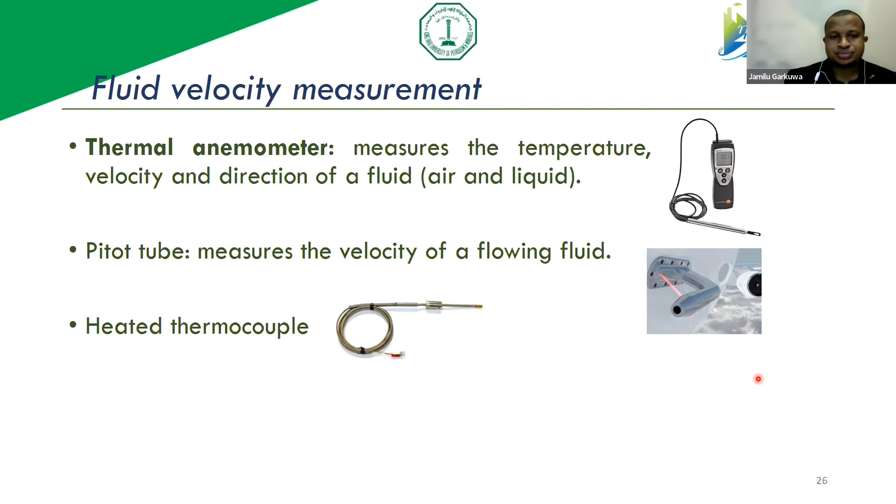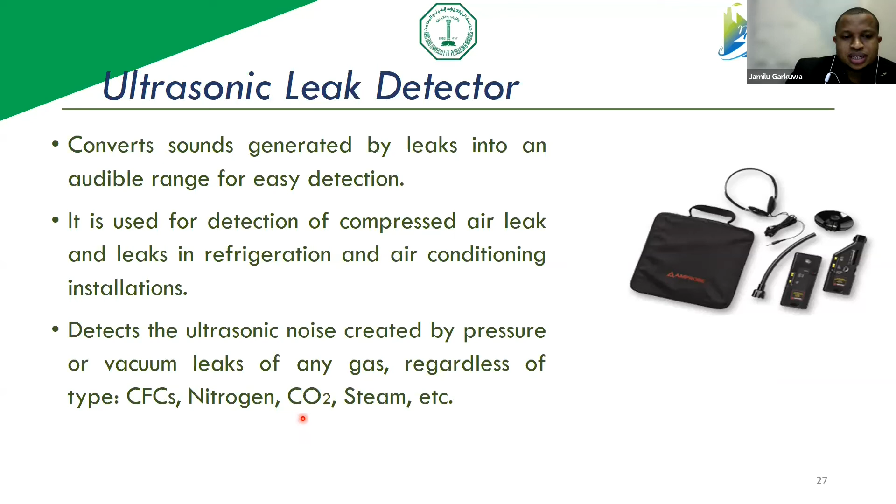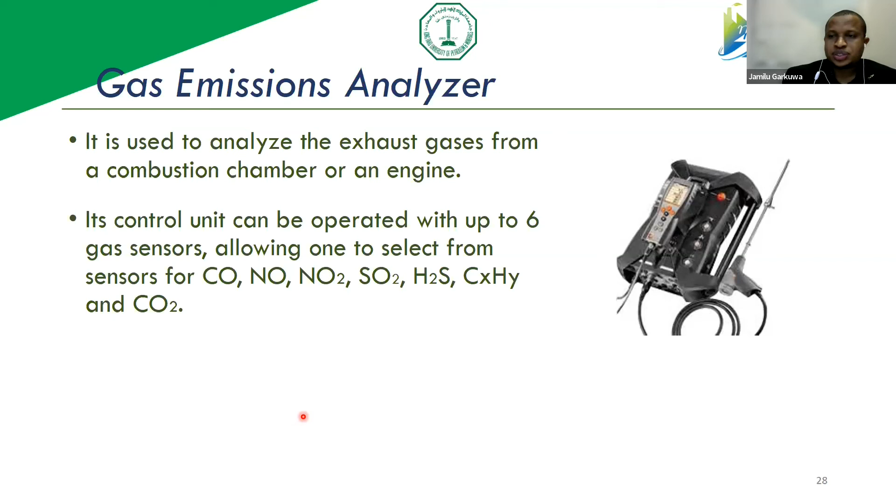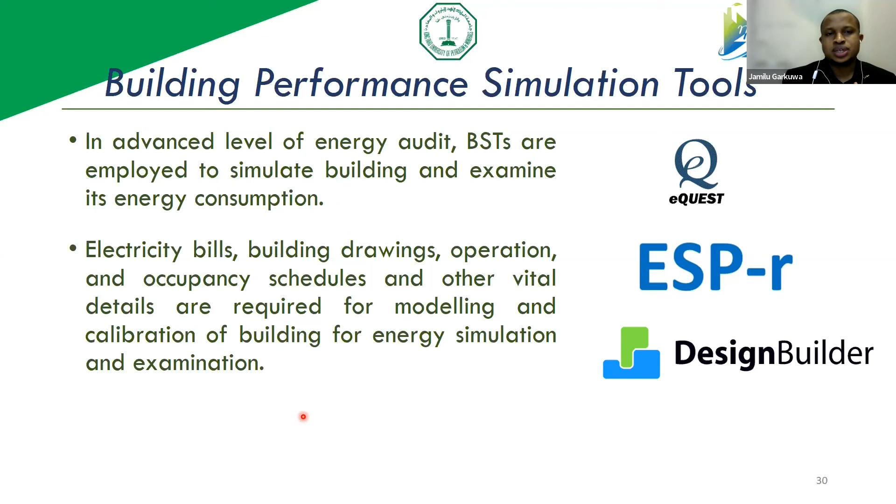Building performance simulation has already been highlighted previously. This comes into play when there is a need to go for level 3 energy auditing. However, if we are just limiting ourselves to level 1 or level 2 energy auditing, we may not need to deploy building performance simulation tools.

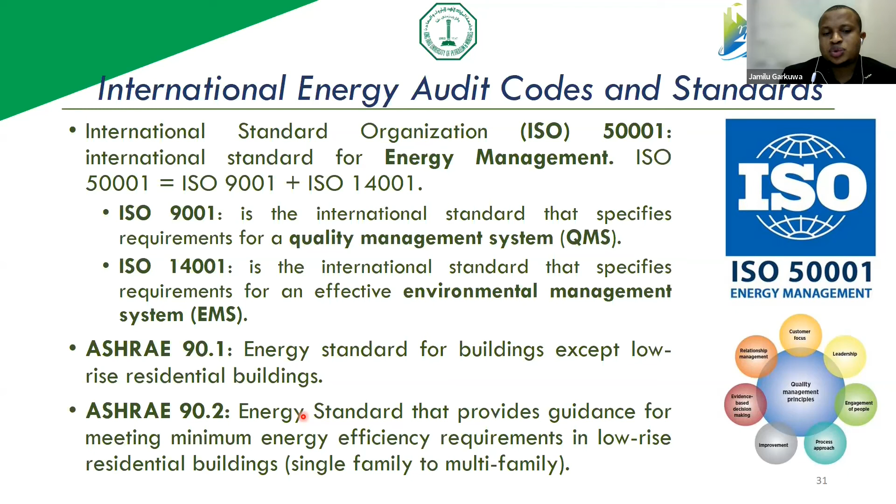Coming to codes and standards, there are different codes and standards from different societies or entities. Depending on what you are looking for while conducting energy auditing, you need to identify the appropriate code to make comparisons. For example, ISO 50001 is a standard for energy management, and it's like a combination of the previous ISO 9001 and 14001. If you need a standard for buildings that are high rise, except low rise residential buildings, you need to check ASHRAE 90.1, and ASHRAE 90.2 is for minimum energy efficiency requirements for low rise residential buildings.

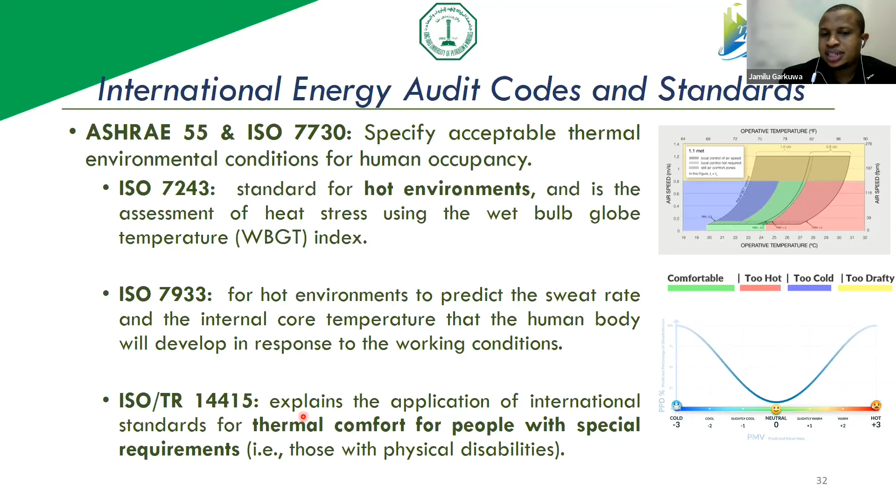So we have different standards, as we can see. There was a question earlier, so this will give you an idea of the various standards available out there, be it for hot environments, for predicting sweat rate and internal core temperature, for thermal comfort, for lighting, for ventilation requirements, for different building purposes.

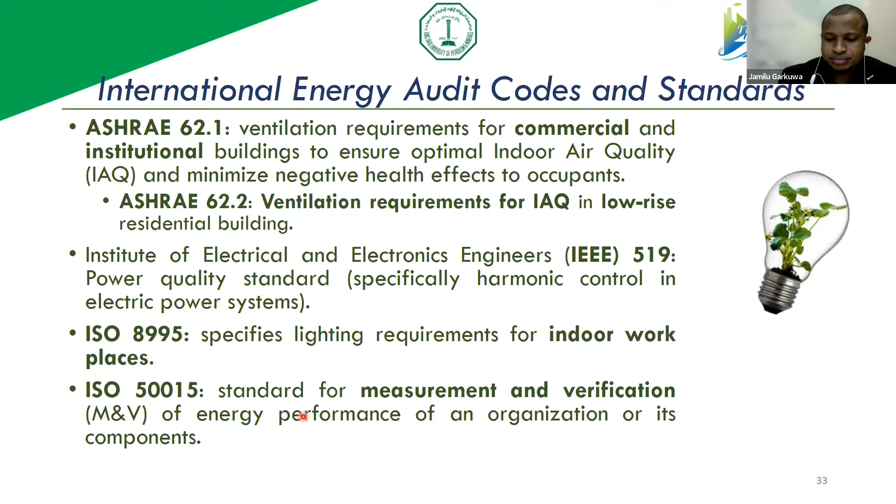So after conducting energy auditing and assessment, what happens? The client will need to know what happens to his energy consumption if he is to implement any of the recommendations. For example, as part of the energy auditing report, the energy efficiency rating is important because it will give an idea to the client: this is the current energy efficiency performance of your facility.

And if you are to implement these energy efficiency measures, there will be improvement in the energy efficiency rating. Hopefully it would be able to improve by one or more energy classes. Also, by reducing the energy consumption, we're indirectly reducing environmental CO2 impact as well. So the client will have an idea if you present this in a report: this is the current situation, and if I invest this amount, I would be able to get this potential savings, which will improve my impact when it comes to CO2 generation as well.

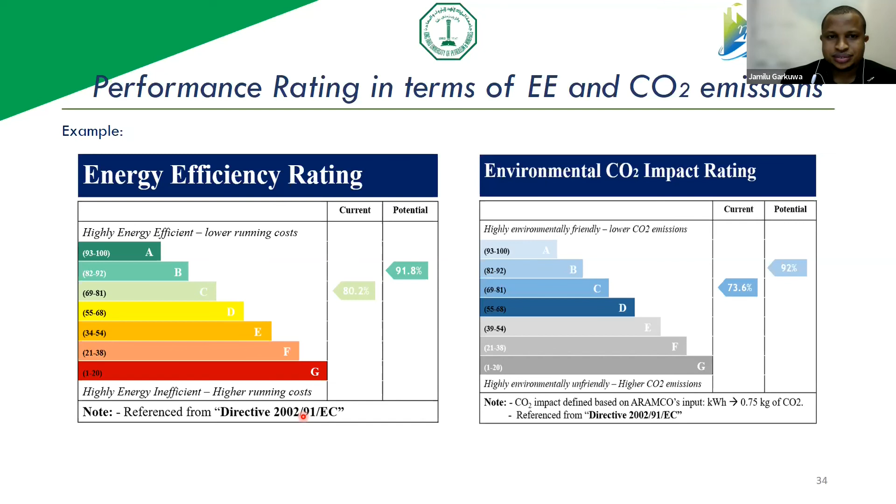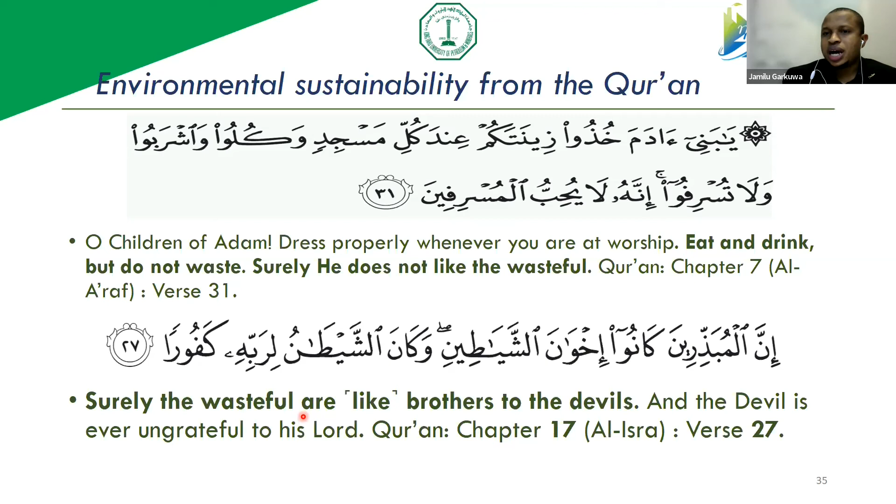As Muslims, we have a duty. We should be able to make reference to environmental sustainability from a religious perspective. It's clearly stated in different places, be it in the Quran and Hadith, about saving - Allah doesn't like the wasteful. This is just to remind us that we should always get back to the basics, and it also shows how important energy efficiency is. So this is to encourage us.

And I will leave us with this quote from Jill Owen: the greenest unit of energy is the one that is saved, not the one that is used, irrespective of how cleanly it is generated. And this is true - irrespective of the sources of generating energy, if you are able to save a certain quantity of energy, it's better than to use it, even if it is cleanly generated.

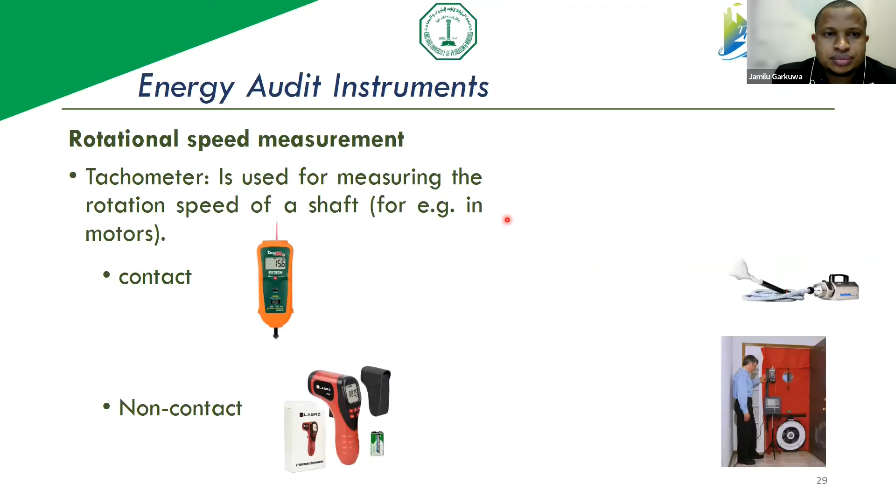Okay, so in level 0, basically it's sometimes conducted using your intuitive experience, walking into any facility or building and trying to identify what's referred to as low-hanging fruits. Based on physical investigation, you'd be able to see, okay, we could save this from here, this needs further investigation, there's an issue here, there's an issue there. So it could be a walkthrough visit requiring identification of low-hanging fruit, and if necessary a very limited analysis, maybe taking some data for a few hours and a few measurements here and there, and you'll be able to make some quick judgments. I don't know if this helps.